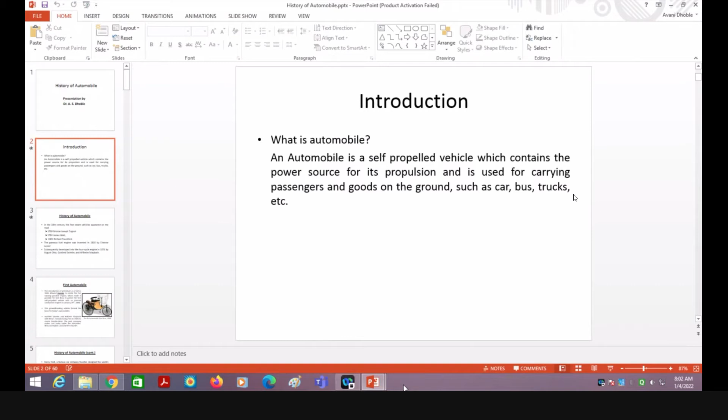What is automobile? What is your definition of automobile? What do you feel? Please speak out what you feel, and then only I will be able to tell you what definition it needs to be.

Sir, it is a machine which is used to take a human from one place to another using some engines. It is a machine to take people and goods from one place to another.

Yes, this is what you said. Am I correct? Yes, sir. Okay, so basically we have to define this. Whatever definition you have given, that is correct, but that is not the complete truth. We have to define it technically, so that we should say there has to be some power source in this.

So if I say, as per the book, the definition of automobile is a self-propelled vehicle, that means it should have some power source which contains the power source for its propulsion, and is used for carrying passengers and goods on the ground, such as car, bus, trucks.

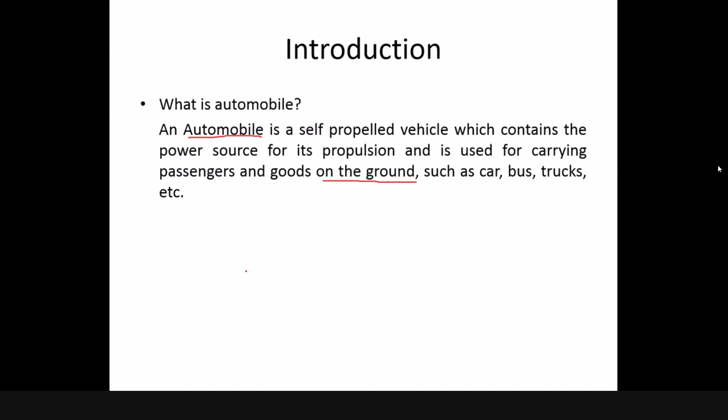Now if we see the history, how automobiles have evolved over the years - there are so many thoughts presented in different books, but I have taken it from one book just for the information. If you read so many books, different books have given different opinions.

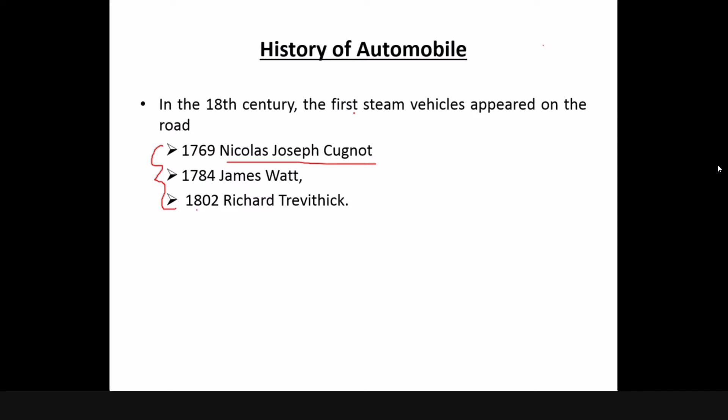Now the general history of the automobile is: in the 18th century the first steam vehicles appeared on the road, and that is basically Nicolas Joseph Cugnot, then James Watt and Richard Trevithick in 1802. These people first made the vehicles which can be used on the road, and they are basically the steam vehicles.

Then after that, the gaseous fuel engine was invented in 1860 by Lenoir, and subsequently developed into the four-cycle engine in 1876. That means after 16 years, you got the development of the four-cycle engine in 1876, by August Otto, and Daimler and Maybach.

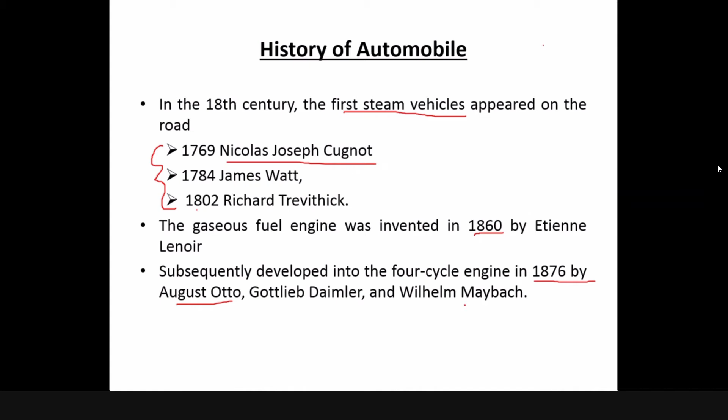After this, the introduction of petroleum as a fuel was done in 1883. This allowed Daimler to create the fast-running gasoline engine, which made it possible for Benz to patent the first self-propelled vehicle with an internal combustion engine. Please note that 1886 is the patented year for the internal combustion engine.

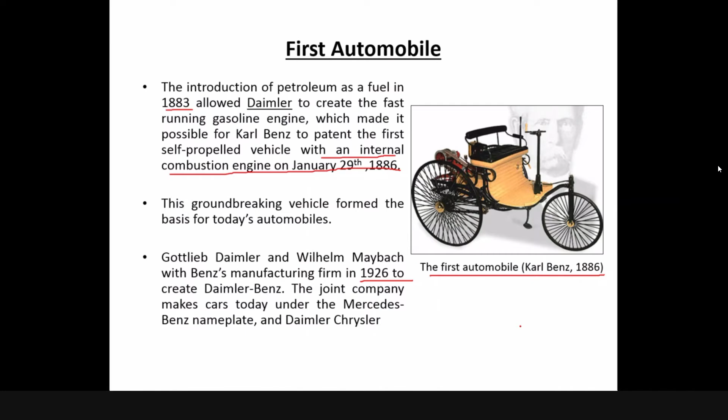Then this groundbreaking vehicle formed the basis of today's automobile, and then they started the factory in 1926. This is the first vehicle as stated in the book - this is the picture of the first vehicle, made by Benz.

Now the real history of the automobile started in 1927 when Henry Ford, the founder of the Ford Motor Company, made Model T by 1927. If you visit Detroit, the Ford Museum is there. So whenever you go to USA, please visit the museum in the Ford Motor Company - they give you a paid tour, and there you will get more insight into how the vehicles have been developed.

Let me tell you that I am that fortunate person who got the opportunity to visit the Ford Museum, and I have seen the Ford factory in Detroit, where all the models are kept and everything is maintained very well, and the models are displayed. There is a guided tour, there is a guide who will tell you the complete story of the development of the Ford Motor Company.

So hybrid cars have also been introduced. Whatever we are talking about today as hybrid cars, they are from 1900. In 1900, Ford made more steam and electric cars than it did gasoline cars. So please understand that electric vehicles are not new to the industry. They were there before gasoline vehicles. So you can say that the electric vehicles we are talking about have a long history, a very old history.

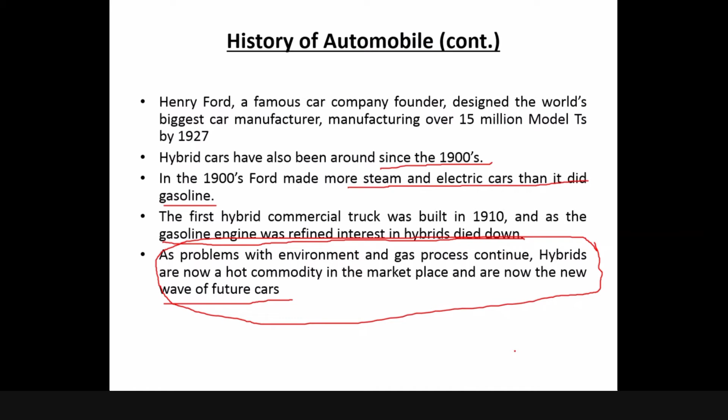The same thing is there in the automobile industry. So this is basically the general history of the automobile. Then there are various terms which are used in the automobile. I am just giving you some definitions.

And then we will discuss how vehicles are designed in the company. Now, the common terms we should know about the vehicle: what is the wheelbase. Wheelbase is generally used to define the vehicle. The wheelbase is defined as the distance between the centers of the front wheel and the rear wheel. That means if the center of the rear wheel is here and the center of the front wheel is here, the distance between them defines the wheelbase.

Then the vehicle center line: basically you take the tire center line for the front tires, take the midpoint, and draw the vertical line. So that is the vehicle center line. Generally the typical wheelbase used in the industry is 2500 millimeters.

Please understand that we are talking about passenger vehicles and not special cases, as most people ask whether we are going to discuss racing cars. Racing cars and other cars used for off-road applications, we are not talking about them. Our scope for this particular subject is related only to passenger vehicles running on the road, that means four-wheelers, to be precise, four-wheel passenger vehicles, that is cars running on the road. So please be careful about this limitation.

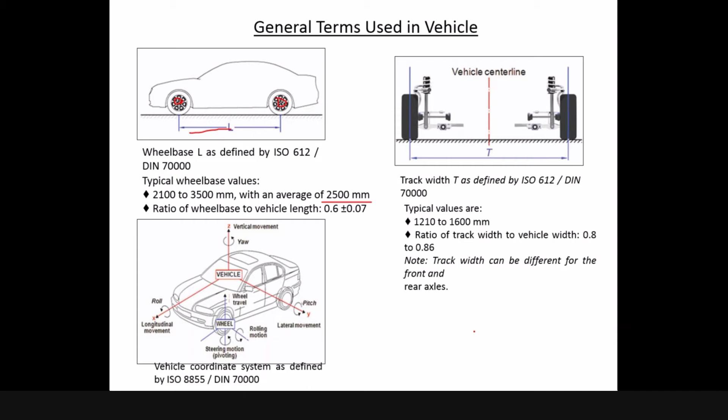So I will start the another presentation, that is the presentation on the vehicle design. Now having been understood the terms in the vehicle, now let us try to understand how the vehicle is designed and developed in the industry.

Now for this particular thing, imagine that you are the boss of the company, you have got all the resources, finances, everything. So how do you start the design process?

Now this is an interactive session. We have started with the theory, but please understand that this kind of text or presentation is not available in the book. I have made it to make you realize that when you go to the industry, you should understand how the vehicle is being designed. Because we hear a lot of stories about the design of the vehicle, but what is actually there inside the industry? How does the automobile industry work? So for that, I have made this presentation on my own.

So this presentation I will share with you, but please try to understand each and everything with interest. And for that, imagine that you are the boss of the company, and how do you design the vehicle? Can anybody tell me? Please unmute the mic and discuss. I'm waiting for your reply. Imagine that you are the boss of the company. How do you design the vehicle?

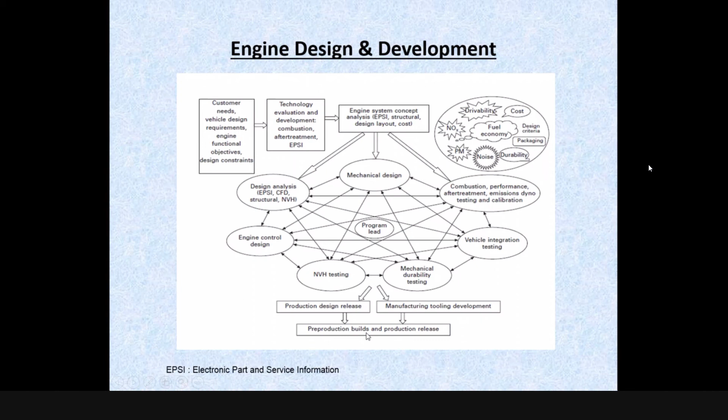Still I am talking about engine design and development. I am not talking about the total vehicle body. The total vehicle has been shown in the previous slide, and out of that I have taken out only the engine. If you talk about the engine, there are so many parameters where you require the knowledge of mechanical engineering, where you cannot say that I am interested in design only, thermal only, or production only. No, you have to have the knowledge of all the things, and that is why your program has all these courses.

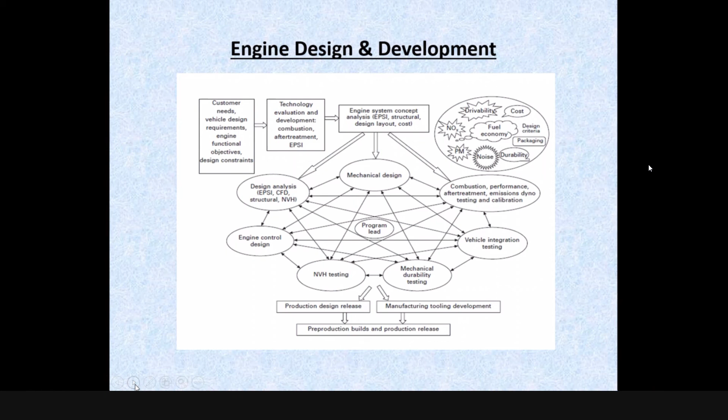So we were talking about the design of the vehicle. Now you have got this many parameters to be taken care of. Going to the next slide. Now you list down the various kinds of systems which have to be designed, and the different departments which you may have in your industry. Please tell me now.

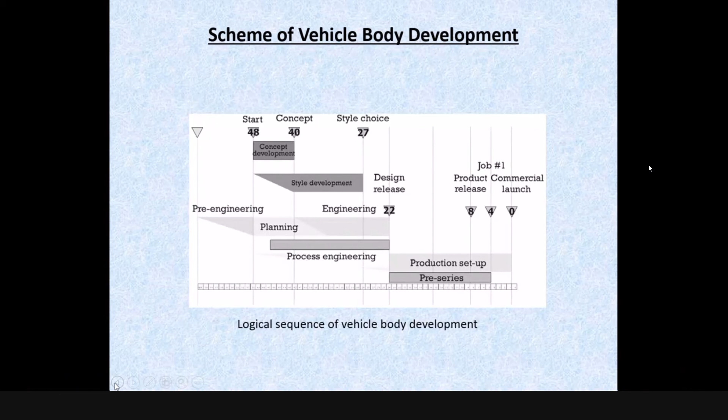Now please tell me. Suspension system. Suspension system department. Okay, vehicle suspension. Then brakes. So I will just note down here. The first one somebody has told is the suspension. Okay. Powertrain. Yes, powertrain. So chassis system. Powertrain is second. Okay, now third is brakes. Chassis system. Just a moment, just give me the time. This is chassis. Then fourth one is body.

Brakes. Fifth one is fuel system. Body. Sixth one is fuel system. Okay. Exhaust. Sir, likewise, you will find that there are 250 components in the engine. So if you make a group for each component, there will be 250 groups. So how are you going to manage this? Okay, 7 I will write down. What is 7, you are saying?

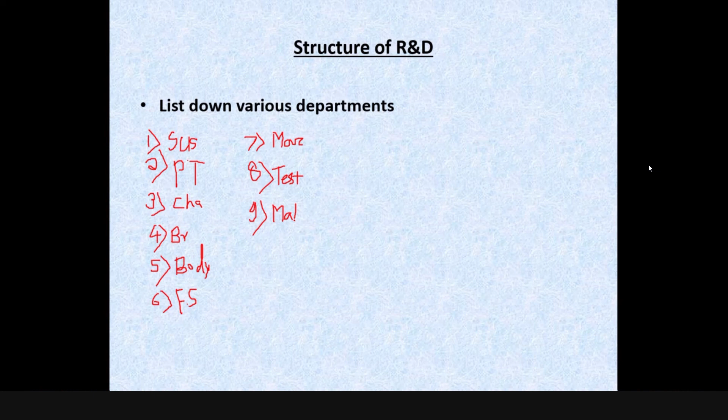Maintenance. Okay. Madam, why do you require maintenance? Sir, for the servicing and all. No, but see, please concentrate on this. You wanted to design the vehicle and produce the actual prototype of the vehicle. So will you require maintenance? No. So please concentrate on the heading, that how many groups will be required.

I am asking electronics. Sir, structure of heat and fluid flow. Huh? Sir, heat and fluid flow. Acha, so heat transfer and fluid flow. Okay. Vehicle electronics. Am I correct? Yes, sir. Okay. The safety. Sir, heat transfer and fluid flow, I can say that this is CFD. What other thing will you require, sir? Safety. Sir, engine efficiency. So here, okay. So engine.

What else, sir? Will your design be complete with this? The manufacturing. Madam, will you need manufacturing in R&D? Sir, steering system. Okay, let's write steering. Sir, power transmission. Sir, if we start doing this particular kind of exercise, then you may come out with up to 50 to 60 groups. Am I correct?

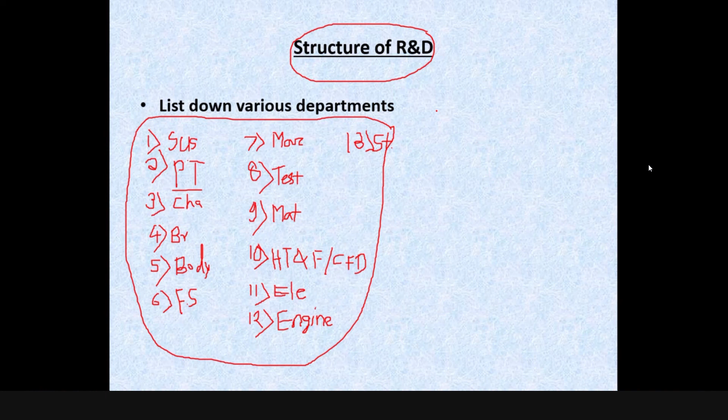No, sir. Okay, so what we are going to do, one moment please. First we see the requirement. So sir, we don't know whether they will work in synchronization with this group or not. So in the next class, we are going to see how they can be managed and how the vehicle can be launched on the road. In the meantime, please try to figure out what the departments are, who is going to control them, and who is going to have the ownership of the vehicle.